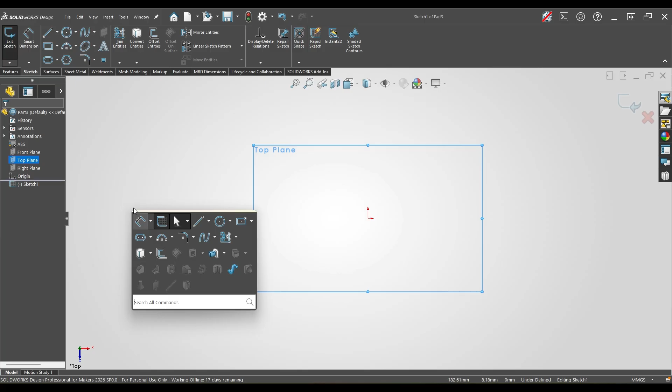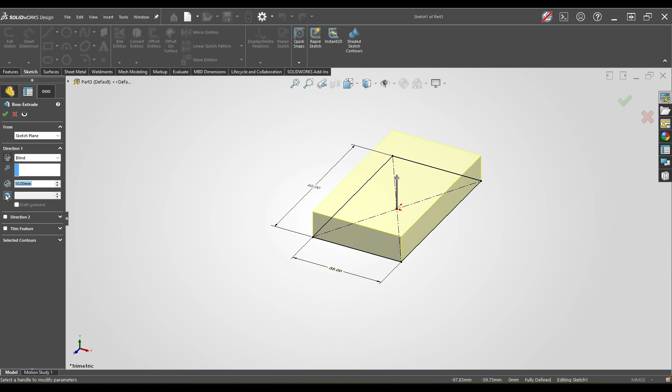So let's just do top plane. I'm going to create, let's go with, I don't know, 60 by 35. This is in millimeters. Let's take this up about 10. Let's just be fancy, put a draft in it. I'll make this 10 as well.

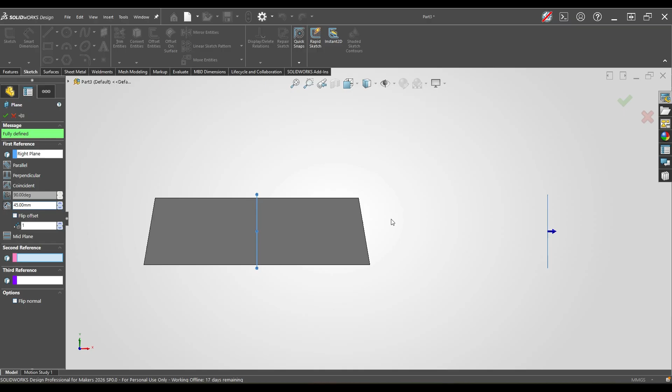So let's go now, right plane. I'm going to click on it, hit Control, pull this out. I'm going to turn that out about, let's say 45 mils. Zoom it in. There we go. Good. Hit Enter. I'm going to pull this up just because of my OCD, seeing those lines for a little bit.

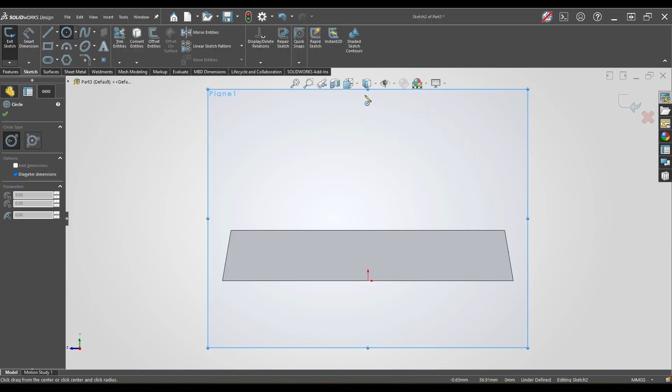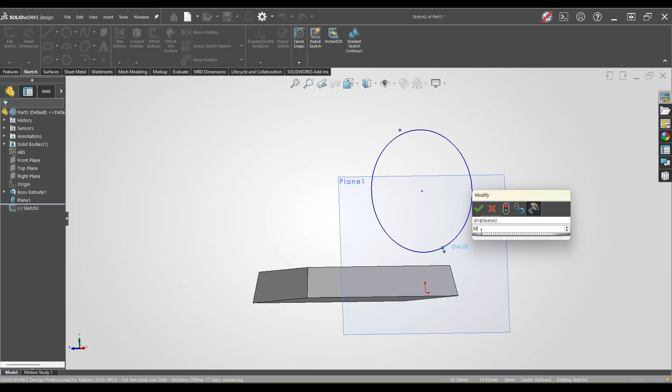There we go. Good. Start a new sketch on it. This one's going to be normal to. This one's going to be center line. Let's make it 40. Let's do less than that. Let's see what that's going to look like. Let's do less than that. Let's do 30. Boom. All right.

Let's get this fully defined. Let's make those vertical. Let's bring this up a little bit. It's looking a little too short. Let's go up 45. Good.

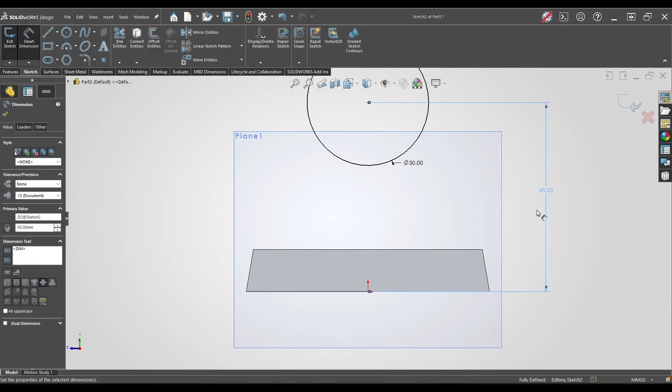Let's make that go out. I don't know, let's say 30. And just to be fancy, let's put a draft on it and make that draft 5. Good. Hit Enter. Okay, let me hide this plane.

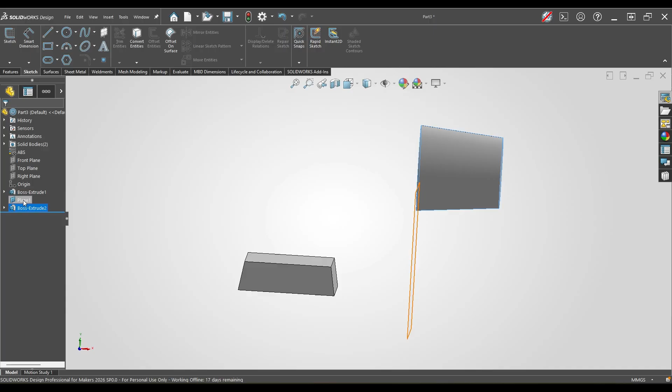And let's loft these two together. Let's go boom and boom. And this is what I often had a problem with, is I didn't really understand these start and end constraints. I want a smooth curve here, so I could do a guide curve, I could do some sort of... there are a number of different ways to do this, but this seems to make the most sense.

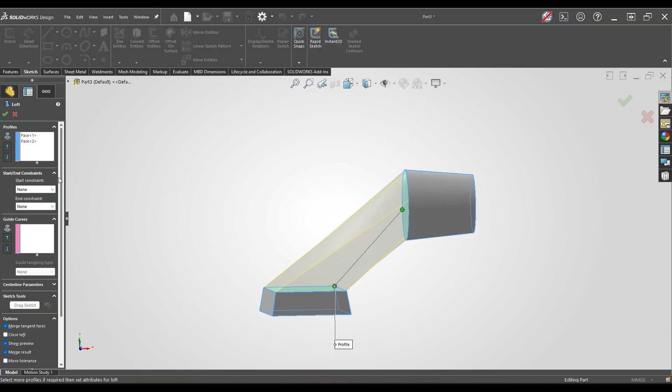So start constraint, I want to be tangent because I want it to look nice and smooth. And I want the end constraint to be tangent as well. So that looks a lot better to me. This is actually one of my sticking points, and I can play with this a little bit if I wanted to, make it a little bit less or a little bit more, bring it up like that, bring it down. I'm going to bring that right to there. There we go.

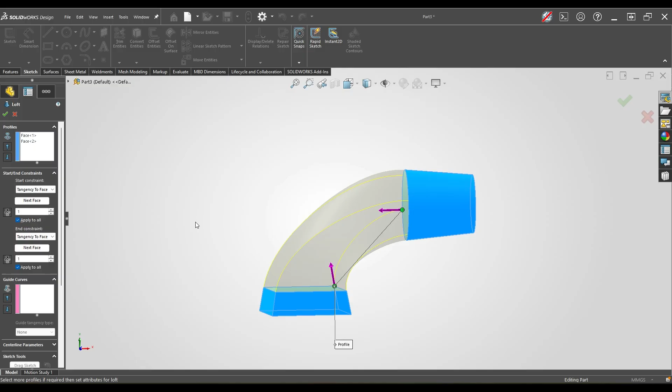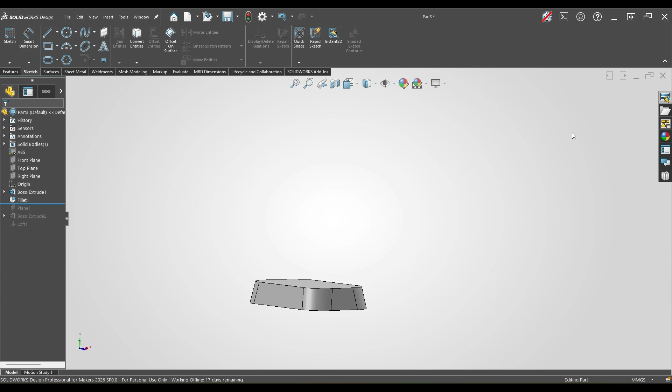Okay, so hit that. All right, so now if I go to make a, you know what I wanted to do is, let me go back and fillet this. Let's go with 10 mil fillets. Boom, boom, boom, and bring it back down. The loft, I'll just redo it. Edit feature. Good, good, good.

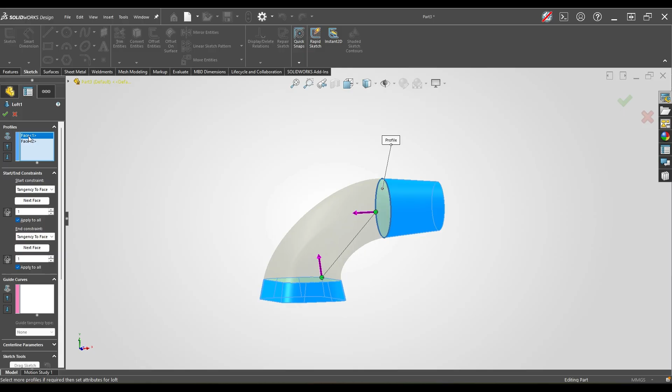Let's go face 1, delete, face 2, delete. Let's go face 1 and face 2. There we go. Redo the start end constraints as tangent. Boom and boom. And that's looking good. Okay.

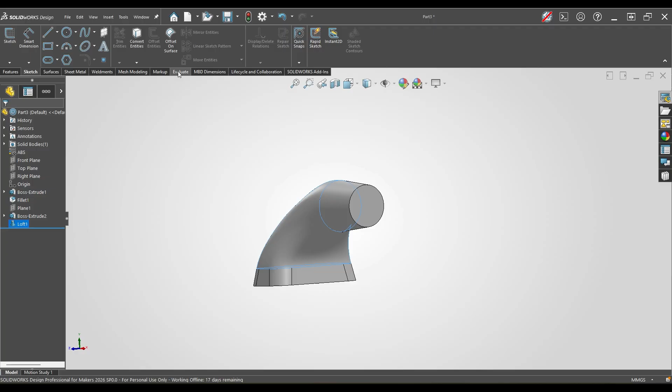So now I want to do a shell. And I've run into this before where I do the shell at whatever thickness I want, and it just looks weird at certain points. So this is the magic, and thank you to TooTallToby for showing me this. I'm going to go to evaluate and check. I'm going to check for minimum radius of curvature, hit the check button.

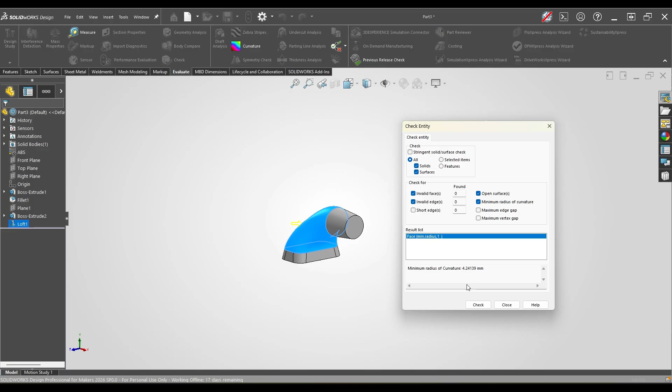I can see where it's going to be right here at kind of that angle there. You can't really see that. There it is there. But the minimum radius of the curvature is 4.24. So if I do, say 5 millimeters, let's say I want to do 5, I'll get an error.

So if I want to go shell, and here and here, and let's say we're going to do a 5, I get this, right? So I know I have to do it from that check. I need to do 4.24 or less than 4.24 basically.

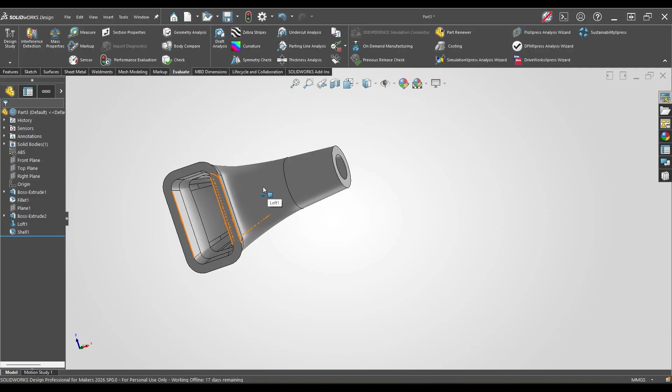So if I just go back to here and shell it out, the problem with this is you can see it in here, you can't really see it. I'd have to do a slice through there and show, but it gets all wonky in there. So now I'm going to edit this and hit 4, and didn't get an error.

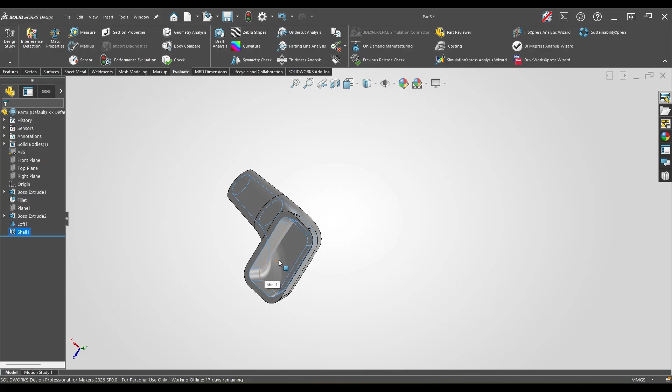And this looks a lot better. You can see, you notice that we're not getting all those different lines in here, and it's a lot smoother. So again, thank you TooTallToby. That was a wonderful power move, and it is going to help me with at least 2 3D printing projects that I am working on right now where I had to do workarounds because I didn't know this.